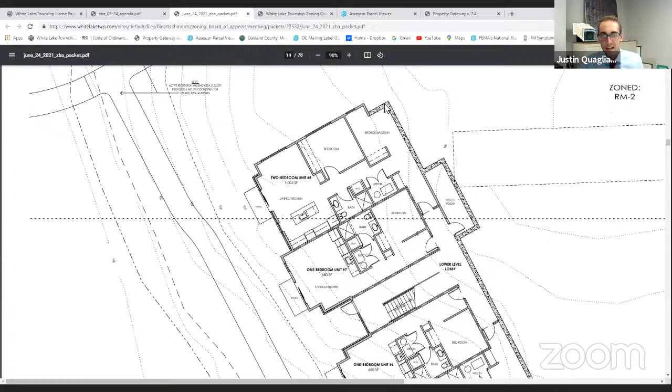So back to the site plan. I know it's hard to see on the screen, but I'll try to zoom in where I can. The minimum side yard setback in the multiple family zoning district is 70 feet on one side, 100 feet total of 2 sides. So the proposed side yard on the west is 40 feet, so they're requiring a 30-foot variance.

The east side yard setback is 30 feet. And then just for informational purposes, the property to the right, to the east - you could consider that to the southeast - is zoned R1C, single family residential. The property to the northwest is zoned RM2, multiple family.

So on the previous plan, which I can pull up later, but it's going to be kind of hard to switch back and forth on the screen, the east side yard was 27.7 feet and the west side yard was 30 feet. So a 42.3 foot variance was previously requested for the east side yard. So overall, the side yard variance request was reduced by 12.3 feet, from 42.3 feet to 30 feet.

They're also requesting parking setback variances. The zoning ordinance requires parking for non-single family residential and non-residential uses to meet the front yard setback requirement unless a 20-foot green belt is provided in accordance with the zoning ordinance. The front yard setback in RM2 is 40 feet. There is not a 20-foot green belt. They're proposing a 10-foot setback from the south Pontiac Lake Road right-of-way line, so they're requesting a 30-foot variance for the front parking setback.

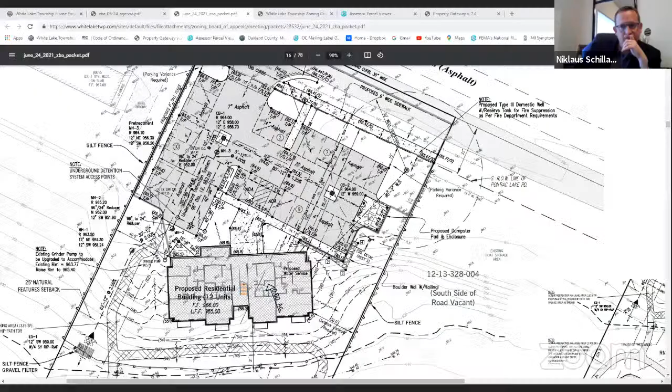This isn't to put you on the spot at all, but just a comparison—so the building has moved, the parking lot, can we really, I don't know if there's a way to see. I'll try to show it on my screen. The difference, it's going to be hard, so hold on a second and let me try to work on that. Appreciate it, thank you.

I have it here, I just gotta figure out how to show it best. Never done split screen before on Zoom, so we'll see how that goes. Hopefully we're closing in on the end of our need for Zoom skills anyways, but appreciate it very much. I hope so. I have faith in you, Justin. All right, I think I got it, and I might have to play around with the zooming a little bit.

All right, so let me share this.

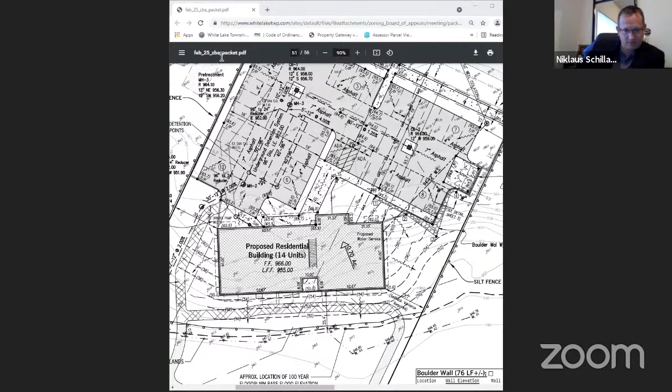Do you see two different buildings or one building? One building. Oh, now maybe you went between two. I don't know, because we see the 14 unit right now. Do you see the 12 unit one or no? No. If you go to the bottom, it looks like if you were to pan over we would see it, so I'm wondering if you almost just need to zoom out.

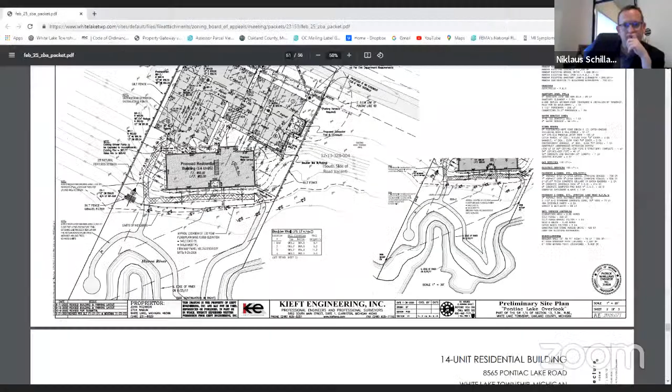I don't think it's gonna let me do it, but right now on the screen, this was the previous building that was proposed, so it was farther back, into the wetland buffer. So the building was shifted this way a bit to the north. And I can go back, here's the other one if you can see that, the 12 unit.

I don't know if it's hard to show them both on the screen.

Could I make a comment? This is Brian Howard, I'm the architect for the project. It's okay Justin, I'm trying to, sorry Nick. No, you're fine. We saw the other one. I appreciate it, I was just trying to get an eyeball, I mean I could do it on my own as well here, I'm just trying to get a sense of.

I can tell that the building has certainly moved out of the wetlands or the natural feature setback, but I was trying to really see what else changed. That's all of my questions, Madam Chair.

Thank you, Nick. Any other questions for staff? If not, then if the proponent would like to address us, he may.

Yes, thank you, this is Brian Howard, I'm the architect for the project. And Nick, just to clarify, as I'm thinking of this, when we reduced 2 units out of the building, we also were able to reduce the size of the parking area. The parking lot has changed dramatically in the sense that the trash enclosure, as well as the parking on the west, has now moved to the east and reduced 2 parking spaces out of that parking lot, as well as the parking lot that used to be 12 spaces along the east property line has also reduced 2 spaces in. So substantially less paving is occurring now based on the fact that we don't have to provide for the parking spaces for the units as well as the guest parking, so that's reduced as well.

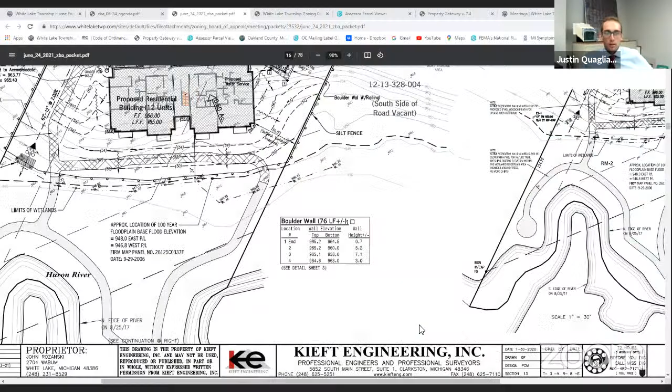Justin, I have a quick question. Do the plans show the dumpster screening material? They do. What you see here is the dumpster detail, so they're showing a poured concrete or block wall trash enclosure. Our zoning ordinance doesn't allow a poured concrete wall, so it would allow concrete masonry units, CMU, for the block. They're showing a 6-foot wall, I guess, or 8 feet, I'm sorry, an 8-foot wall with a metal gate.

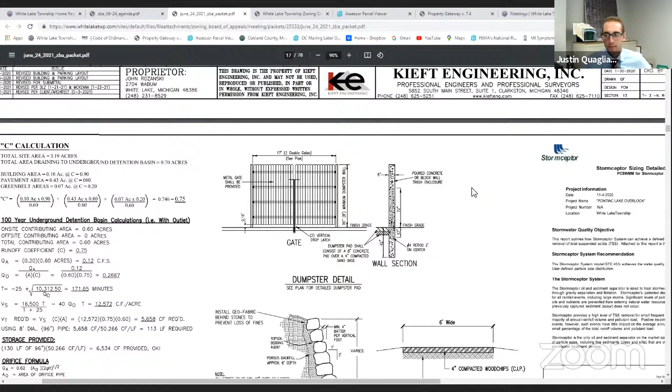Okay, I don't know if you can answer this, or maybe Debbie can. What is the building itself going to be built with? It's not going to be concrete?

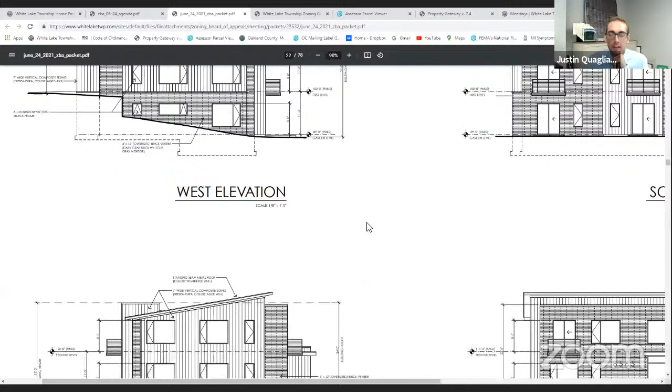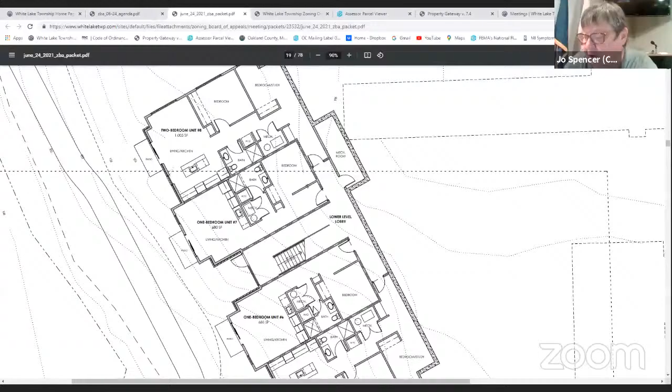No, block. They're using a combination of brick and/or brick veneer and siding, so composite siding. So I'm wondering, Mr. Howard, if it would be possible to, for lack of a better term, beautify the dumpster that's going to stick out by using the same material on the outside of the concrete block as on the building.

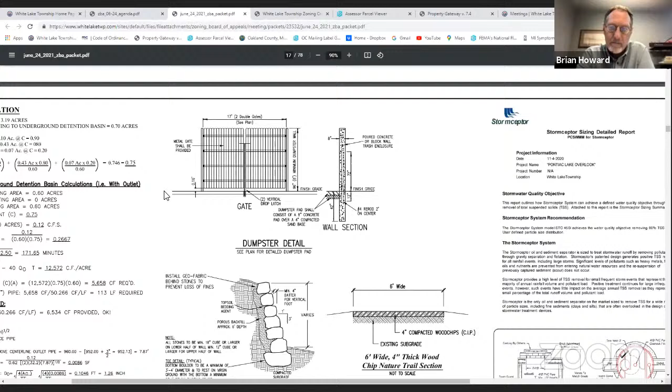Yeah, we will absolutely make that trash enclosure a brick veneer enclosure to match the building, with a limestone cap on top. Does that show on the plans already, Justin? They'll have to revise their plan. It does not currently show that. So if we make a motion, we might want to consider that as well, just to make sure everything's taken care of. Any other questions?

Go ahead, Kathleen. I'd like to comment also on the dumpster. Since it's going to be so visible, clearly we want it to look aesthetically pleasing. I would even suggest some masonry brick.

And I'm curious, are the gates metal gates in front? It was a metal gate on the detail. I'm wondering if maybe some white vinyl, something a little more attractive, would be possible.

I would propose that we make them out of wood and paint them. We've found in other cities that the durability of vinyl starts to warp over time because trash crews don't take care of gates very well. So I'd propose we build a metal frame for the gates and mount wood slats to that, then paint them. They seem to last longer and create a more visually appealing look than the metal ones, so we can change that detail without a problem.

How do you feel about maybe masonry brick as something aesthetically more pleasing than the concrete block? Oh, I believe, no, we would definitely make the exterior of the trash enclosure the same brick veneer as the building, to match. So it won't be a poured concrete wall like is currently stated on our civil drawing.

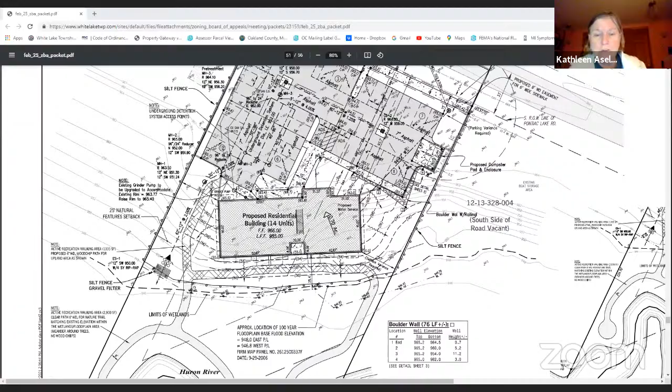Well, going back to the landscaping, since we kind of have to nail this down, I took a few notes here, and I'm thinking 3 to 4 foot shrubs, evergreen trees, some shade trees. Justin, could you maybe help out with this? You probably have more landscape architect experience than any of us. Could you make any recommendations?

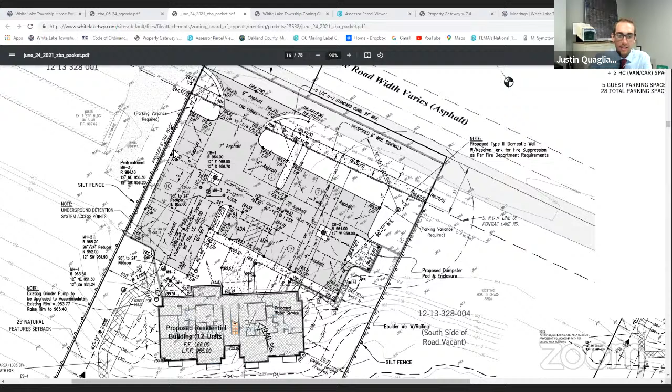So here's the plan. They have no room here to put trees on this west side or this northwest side, so you'd have to have shrubs. I'd suggest 4 feet in height at the time of planting. We put a fence there, Justin, along that property line. Okay, I see the fence, but I don't think plantings are needed against that side. What I would propose is screening the greenbelt area between the parking and running parallel to Pontiac Lake Road, certainly.

And then we have quite a bit of landscaped area. If you move your cursor towards the trash enclosure, in that area we could put shade trees, bushes, things like that. As we move down the hill, that's going to get more difficult for stuff to really last. I think they're focusing around the parking. Yeah, no, I agree 100%.

I think John's comment was spot on, which is we really do want to provide something secluded, or I don't know if we want to call it that, but something we all feel is needed. What we have to do in Royal Oak and Ferndale is provide a 3 foot high wall so the headlights of the cars don't go out onto Pontiac Lake Road. I'm not proposing that, but I think an arborvitae or a boxwood hedge or something to that effect running along in front of those car lights would be a huge benefit to screen the parking lot, but also to screen the headlights of those cars.

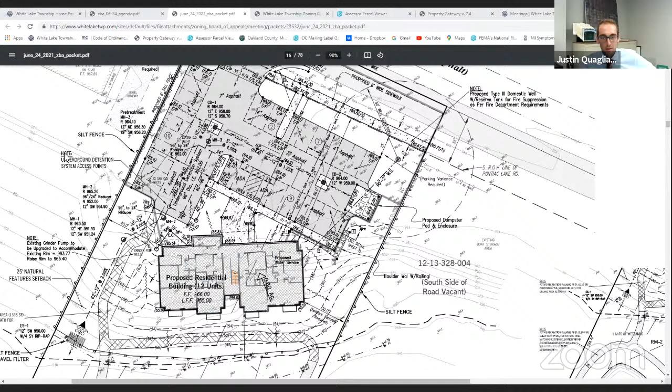When a motion is made, I'd like that reiterated and put into the motion. Could we indicate that in our motion, Justin? No, I think you need to be specific. So be specific, okay, that's what I was looking for. Thank you, I can help you be specific if needed.

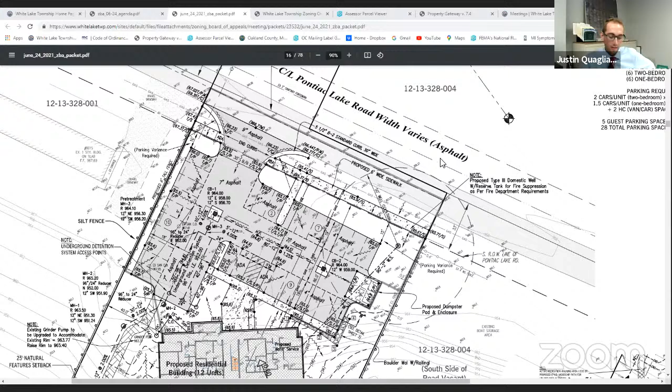Madam Chair, I have a question, for Justin or for the applicant. What type of 6-foot fence along the northwest wall is that? Is that wood or vinyl? It was going to be vinyl. Would it be white? It was going to be white, correct.

And with the landscape plan, do we need any sort of irrigation to make sure those bushes and trees don't die? Yeah, they're going to have to irrigate it. When this comes to the planning commission, the landscape plan will have to have an irrigation plan. That's a requirement.

And there's no wall or fence shown on the east side? They're showing a 6-foot tall fence going to this right of way line, if I'm not mistaken. Is that where the fence is extending? Yep. So fencing has to meet the front yard setback, you can't run a 6-foot fence all the way up to the right of way line.

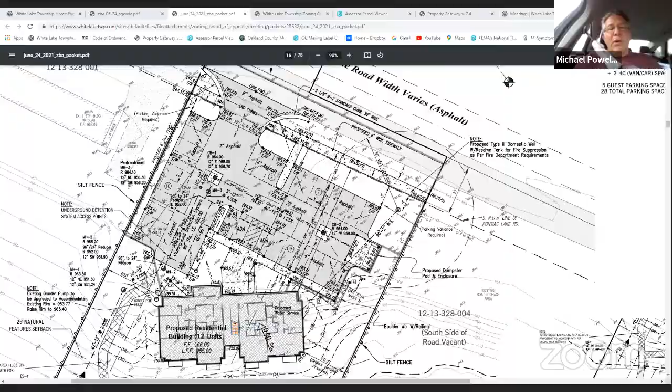Madam Chair, Mike, is Justin, are we able to allow the fence to just be lower, certainly not the 6 feet? My concern is the car lights in that area shining on the adjacent neighbor, and vegetation tends to be sparse sometimes. Are we allowed to drop it down in height to cover the headlights, or no fence at all?

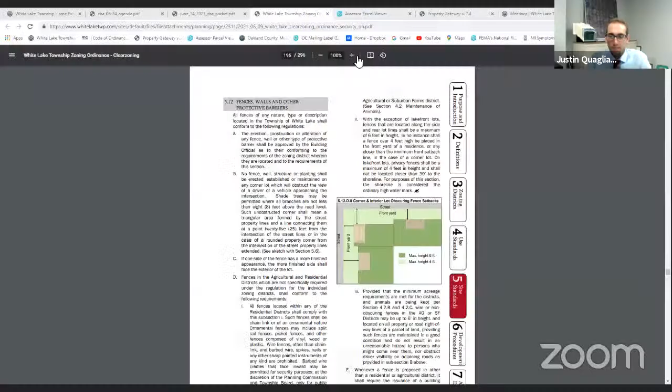The zoning ordinance does not allow a fence in the front yard. Here's a nice graphic. If there is a fence in the front yard, it has to be 4 feet. So they can't even have a 6-foot fence, it could only be a 4-foot one.

If you recall, about 2 or 3 years ago we had a case with a corner lot that had 2 front yards, on Round Lake Road maybe, or Carroll Lake, one of the two. Sorry, I got the road mixed up in my head.

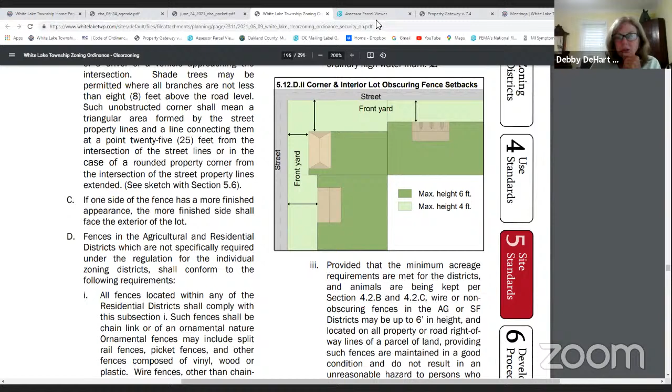So we could drop the fence once it hit the front yard to a 4-foot fence, making it a staggered fence. Really, in the front yard setback, they can't have a fence at all, and in this case the whole fence is in the front yard, so it would have to be 4 feet.

So this fence would have to be a 4-foot tall fence up until 40 feet from the right of way line, then the fence would have to stop. Everything in front of this line of the building is the front yard — imagine the line going back and forth like this, that's the front yard. And that pertains to multifamily also versus a single residential property.

Even though the parking lot's in the front yard, they could have a screen wall. The ordinance allows a screen wall, not a fence, but an actual screen wall. Screen walls would have to be 6 feet in height, so it couldn't be a fence. It'd have to be 8 inches of brick or decorative stone. So it would allow a screen wall, but not a fence.

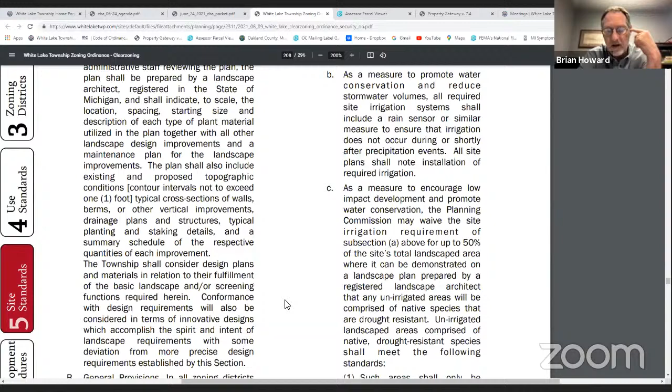So are we talking that that particular screen wall would be built similar to our trash enclosure, a brick veneer? And as Mike's comment was, then providing landscaping in front of it. I don't think, Mike, we can provide landscaping on both sides of it because we're talking about putting our wall kind of right on the property line.

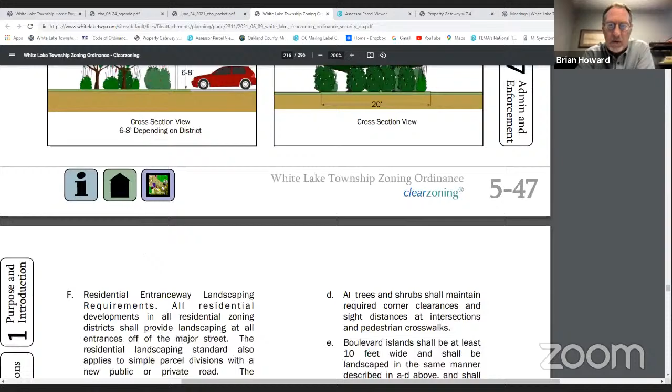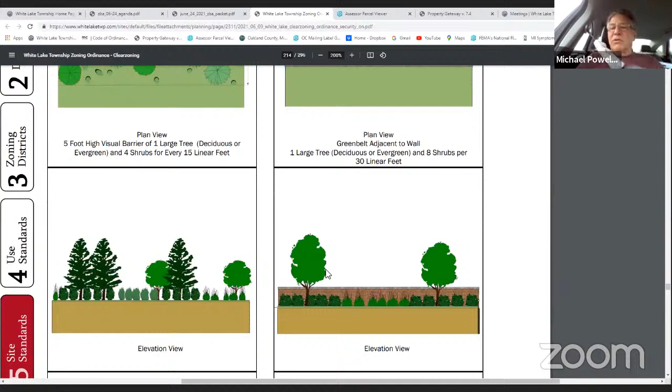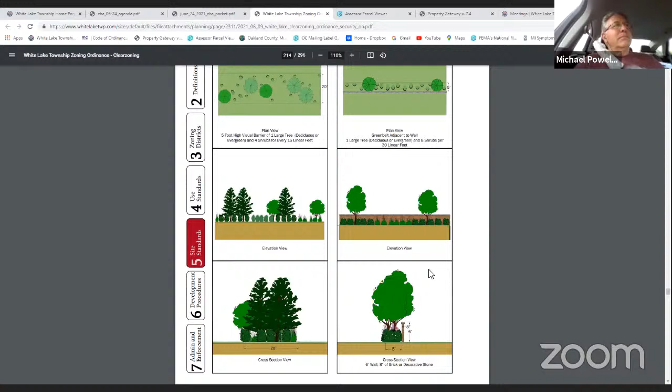I've always had a little trepidation with that because the applicant gets the beautiful landscaping and the adjacent property owner gets the view of the backside of a wall. So I typically like it more centered, but I don't think we have the room to center it, because it's only 5 feet. So it would be put in sections and maybe you jog it back and forth with landscaping. I'm just talking out loud here as an option. We're not opposed to providing a different type of screening against that property line.

We showed the fence only because that got brought up at our last meeting, which said basically try and figure out something to do with the headlights of the cars. I don't think for us it matters. I don't really want to see a 6-foot high fence there anyway, to be honest. I agree. I would prefer to see a 3-foot tall wall.

I don't know what our options are from the zoning ordinance, but could we do a metal aluminum fence that's narrower than a brick wall, that would allow potentially fountain grasses or arborvitaes on both sides, because now we're talking about more of a minimal thickness of wall. Yeah, and we have to be careful, it's not a fence, it's a landscape buffer enhancement.

And if we did that along the east side, quite frankly, we ought to talk about it along Pontiac Lake Road as well, to provide for an architectural feature that kind of blocks the front end of cars parked in through there, because landscaping is sparse, and it might be nice to have a landscape buffer enhancement there to pull your eyes away from the cars.

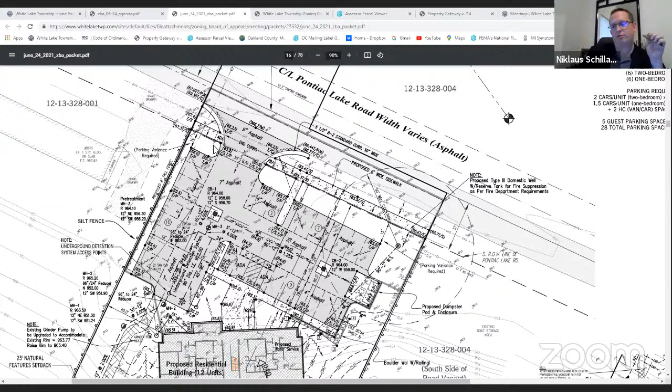I thought that was discussed at some point. I don't have a note on that, but I don't disagree. I thought it was 4 street trees that came up. We would provide 4 to 5 shade trees along Pontiac Lake Road, between the sidewalk and the new wall.

Anything else, fellow members, that we missed? You took all of my notes.

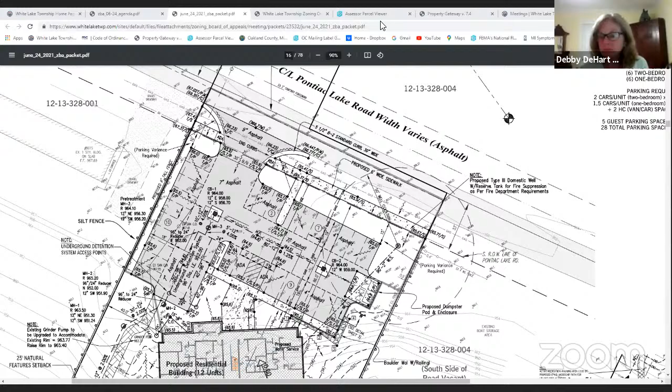Ms. DeHart, for reference, the planning commission has the final say on approving the landscape screening. Should I specify that as well? I guess we have to say that these conditions would have to be satisfied in order for the planning commission to approve the landscape plan. So if the ZBA is requiring conditions, when the planning commission reviews the final landscape plan, they'll make sure that these conditions were satisfied, if it doesn't meet it, they'll be back here. Is that what you were getting at, Debby? When this comes back to the planning commission for final site plan, they'll have to show that all of these requirements were met.

No, because that's implied - the ordinance requires that the planning commission review it. Did we address the perimeter curbing and guttering in this yet? Yeah, they're not getting a variance for that, so we don't need to include that.

Do we have a support on Nick's motion? I don't think he's gonna want to go through it again. Nick, please repeat that motion again for us. Well, I'm gonna make sure Hannah got it all first. Do we have a support first? I'll support. Debby can support. Kathy, go ahead. Kathy supported, Debby supported.

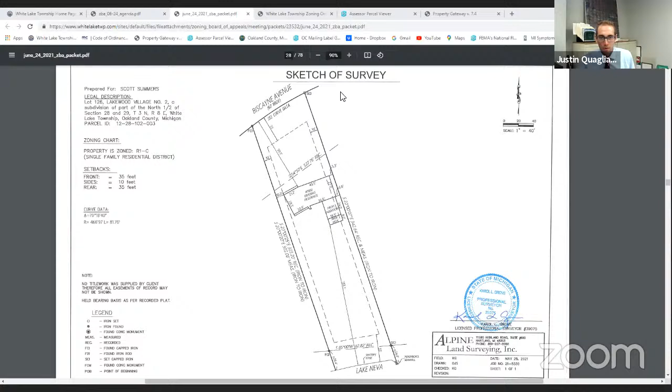The proposed addition is 444 square feet in size and located 6.6 feet from the east side lot line. The proposed deck is 148 square feet in size. The architectural plans note the added area would be 535 square feet. The addition and deck total 592 square feet in size.

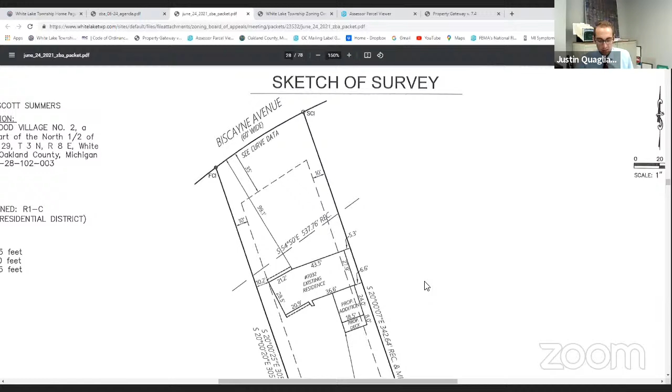Additionally, the architectural plans—where are we here? Sorry if you get seasick while the plans are being scrolled through.

The architectural plans show the roof overhang located 5.25 feet from the east side property line. The proposed side setback—they're requesting a variance for a side yard setback to be 3.4 feet, or a 3.4 foot variance for a 6.6 foot side yard setback. With a 1.5 foot overhang and that setback, the roof would actually be 5.1 feet from the east side property line.

If the board approves the request, The plans will just need to be revised for consistency.

Article 7, Section 28 of the zoning ordinance states repairs and maintenance to non-conforming structures cannot exceed 50% of the SEV, state equalized value, in any 12 consecutive months. Based on the SEV of the structure, which is $99,600, the maximum extent of improvements cannot exceed $49,800. Value of the proposed work is $96,000.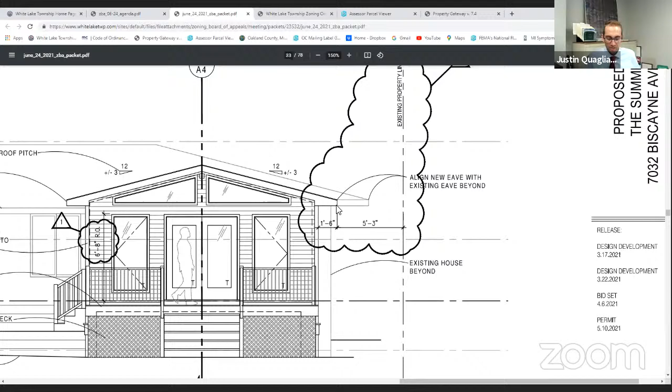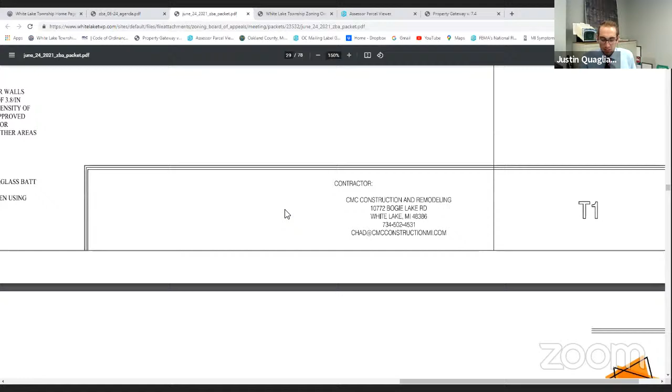So a variance to exceed the allowed value of improvements by 193% is being requested. In summary: the side yard setback variance request is 3.4 feet to allow a 6.6 foot side yard setback, an 18.3 foot variance for the lot width, and a 193% variance for the value of improvement.

If you have any questions, I'd be glad to answer them. Thank you. Any questions of staff?

I'll have one, and I'll ask it now so it gives Mr. Summers a chance to think about it too. It's appearing to me that maybe the side yard setback—the house couldn't move any further over because there's a window there. That might be the issue.

Yeah, this is Scott Summers. Oh, sorry, we'll get to you in a second. Okay, I didn't know if you wanted me to reply. No problem, I'm just giving you a chance to think about what I'm going to be asking here.

I'm just trying to think, Justin, is there any other reason you'd see why that wouldn't move over, other than a window? I believe that's the case the applicant is going to make, that there is a window there, and that was their case they were going to make.

Okay, that's helpful. Any other questions of staff? Justin, do you know the year this house was built? Yes, I do, and I had that.

And for some reason I didn't put it in the report. Hold on, I have it in my notes here. I don't know why I didn't write it down. This house was built in 1960. So in 1960, those setbacks would have been approved when they constructed the house. They received a building permit to construct the house in that location.

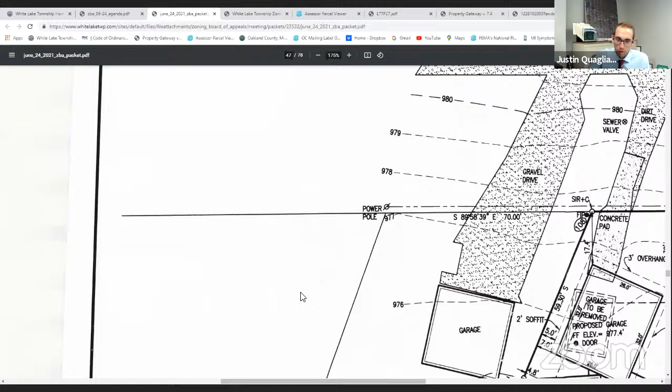So currently, the existing structures are non-conforming, and the detached garage, which you can kind of see cross-hatched here—I know it's hard to see with all the lines, but that's the existing 1-car garage—is considered part of the principal building because it's located within 10 feet of the house. So the 2 structures comprising the principal building are 4.7 feet from the side lot line, which is here at this corner of the house. And then the current garage is 26 feet from the front property line.

A minimum of a 10-foot side yard setback and 30-foot front yard setback are required in R1D zoning. The parcel is also 70 feet wide at the right-of-way line, and in R1D zoning, the minimum lot width is 80 feet. So the proposed addition is...

1,708 square feet in size. The first floor would consist of a 676 square foot 2-car garage and 200 square feet of living space, including a new laundry and utility room. The second floor would contain 832 square feet of living space, including 2 bedrooms and 1.5 or 2 bathrooms.

The plans show a 5-foot by 5-foot porch here, which would provide access to the addition. It's my understanding that the current front door would be closed off if this addition were to be constructed. And then the plans provided by the applicant show that this area here is where the tie-in will take place. They'll have to construct appropriate footings or a foundation. Right now, there is nothing there to support it, so that would have to be somehow constructed to meet building code.

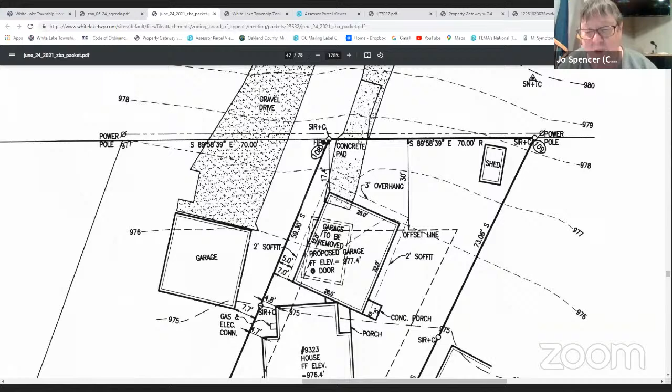I can calculate a different value if that's the direction you go. If you have any questions, I'd be glad to answer them. Thank you, Justin. I was going to ask that you calculate the percentage just in case we do want to go that route.

Any questions of staff? Mike, go ahead. Yes, thank you. Am I able to be heard? Yes. Okay, thanks. It's interesting that modern cars turn off automatically after a period of time, and that disconnects me from everything, and I have to get back in when the car turns off and turn it back on again.

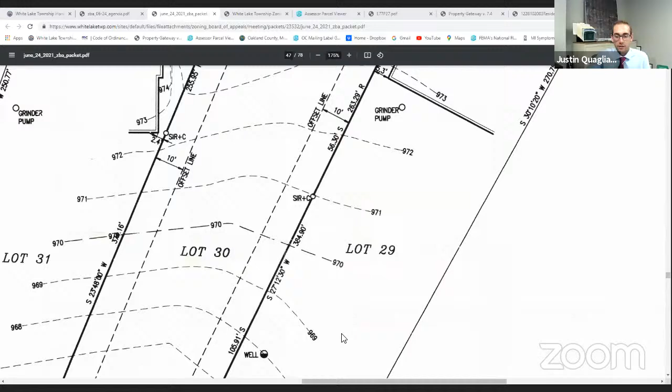So I'm just wondering, Justin, whether or not the floor plan for the existing structure was submitted as well. It's very vague how this new addition is going to relate back to the existing house. So we have renderings, we don't have a real floor plan. I can show you what was submitted.

So on the right side here, I'll go through several photos or renderings the applicant provided. This is the current house. This is the proposed addition. So you can see there'd be a connection here.

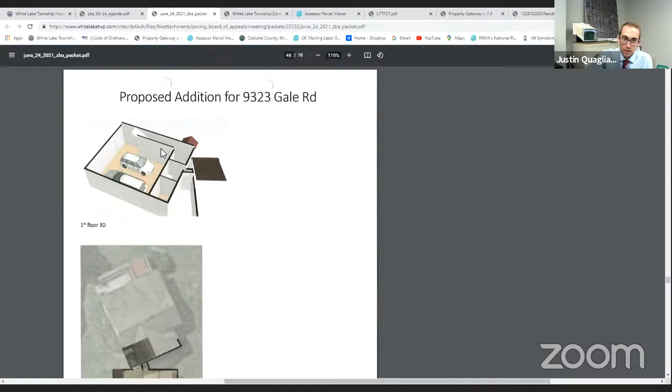You walk into the laundry room, which is separated from the utility room and the foyer by a door. So there's a door here, and there would be a door here. And there's the covered front porch. So you can either go up this way into the addition, or through the laundry room into the other house.

So you can kind of see, from an aerial view, the current house connecting to the proposed addition, walking into this vestibule area here, so you can either go up this way into the addition, or this way to the west into the main house.

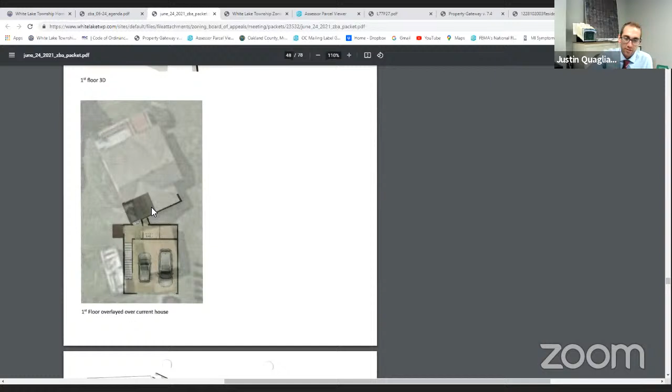This is another view. This is their current front door, which the applicant said they would close off, and this is where that connection would be to the addition.

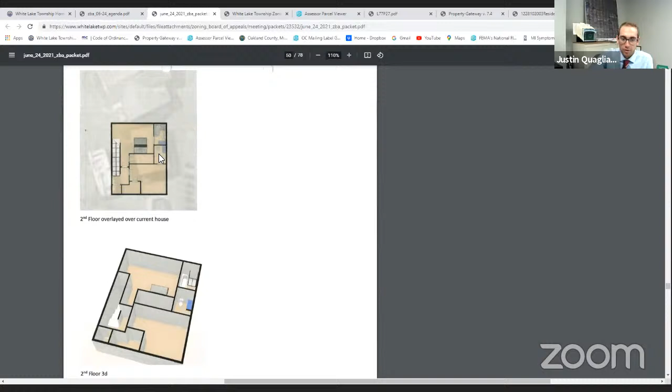This is the second floor layout of the addition. So there's a bedroom, a closet, a full bathroom, another bedroom, another closet, and what looks like a half bathroom on the second floor.

That's a rendering of the addition, and then that's another rendering showing how the existing house would connect to the addition.

So, my overall question was, I don't know how many bedrooms the existing house has. It has 2 bedrooms. Okay, thank you.

So there's 2 bedrooms proposed in the addition, and the current house has 2 bedrooms. I don't know if that answers the question.

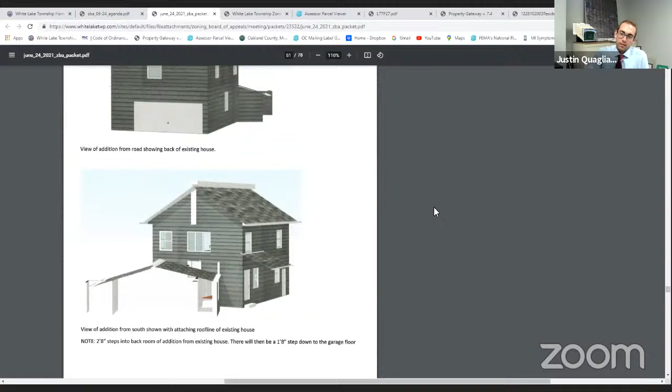I'll ask the applicant how the two parts, the new addition and the existing home, are going to relate to each other. They almost seem very distinct, and as you pointed out, it almost looks as though you could have two separate families living in this structure.

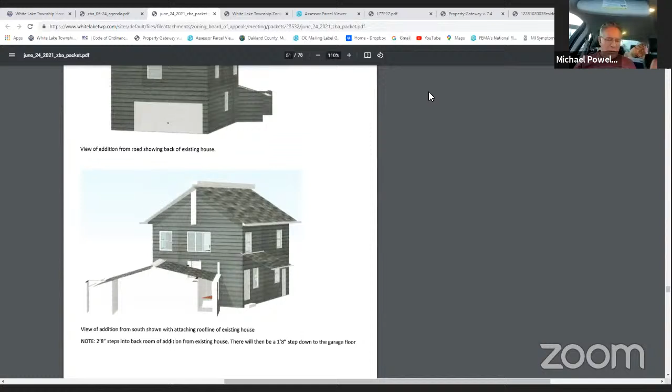Sure, I'm happy to answer that question, and I totally agree it can look like that. Yeah, why don't you wait? We have to finish our discussion first. Okay, sorry. That's okay, that's very common, don't worry about it.

Any other questions of staff? Yeah, Justin, so SEV, it's just coming to my mind, even if we throw a big number on, what happens? I mean, the SEV

is determined after the construction is complete, correct? So you're talking about what the value of the property, or the structure, that's the increase, yeah. So, isn't that determined after everything is done? So they have to give us a valuation of the improvement, and that's what we base our building permit fees on.

And then, when you have a non-conforming structure, the purpose of that section of the ordinance is to limit repairs and maintenance to a non-conforming structure within 12 months. So I don't know, right now the SEV of the house is $39,400. I can't tell you what the SEV will be after the addition, but based on the International Code Council, the value of that addition is $169,400.

That's what the International Code Council says the value of that addition is based on the current construction costs.

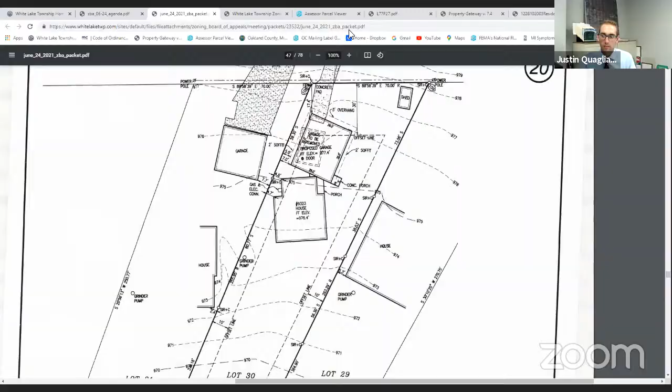Because Mike, I don't have my computer screen in front of me, and the width of the lot is 70 feet, and that is the east to west request, and he's providing a 7-foot setback on the west side. So I guess my question is, are some of you saying that on a 70-foot wide lot with a 10-foot setback requirement on each side, that a 50-foot wide house is a hardship?

I don't think I understood the discussion that the width of the lot is a hardship, and I didn't follow that thinking. I think the width of the lot hardship is because he was asking — I have to go look back for the variance. A variance, isn't it 80 feet?

So that's the zoning standard. I guess what I think, Mike, what you're trying to get at is that there's a lot of lake lots that are less than 40 feet in width in R1D zoning, and this is 70 feet in width. So someone could build a 50-foot wide house on this parcel regardless of the width. So if they met all their setbacks, they wouldn't be before you because the lot was not — it was 70 feet wide and not 80.

So if they met all their setbacks and lot coverage and building height and all the other zoning requirements, then they wouldn't be before you because the lot's 10 feet too narrow. I thought that was minimum lot, but that's variance number 3.

So even if they did construct a house that fit in there, they would still have that. And that was what I was getting at, was that is the hardship for variance number 3.

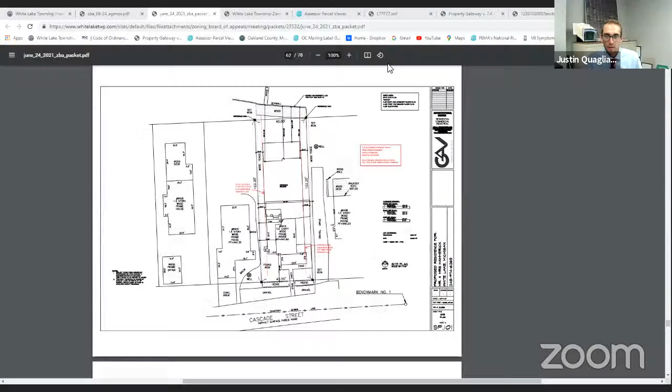Thank you, Madam Chair. On the screen before you, this is a site plan provided by the applicant. This property is 4,880 square feet in size. It's located on Cooley Lake. It's zoned R1D. The property is currently undeveloped. The previous home was demolished within the past month or so. The property does have access to the public sanitary sewer system.

The applicant is proposing to construct a new house. Back in October of 2020, the Zoning Board of Appeals approved variance requests from the prior owner to construct the house. Variances are valid for a period of 6 months unless a building permit is obtained during that time and the project is commenced in accordance with the terms of the building permit. The prior owner did not obtain a building permit within 6 months of approval, so the variances are expired and void. The following variances were approved at the last meeting: a 5-foot variance from the east and west side yard setbacks, a 10-foot variance from the front yard setback, a 26.86% variance to exceed the maximum lot coverage, a 40-foot variance from the required lot width, and a 7,120 square foot variance from the required lot size.

So in May of this year, a permit was issued to demolish the former 1,100 square foot house, and that house was non-conforming. Here's a survey that was submitted by the applicant showing the prior house. That house was non-conforming; it didn't meet the front and side yard setbacks.

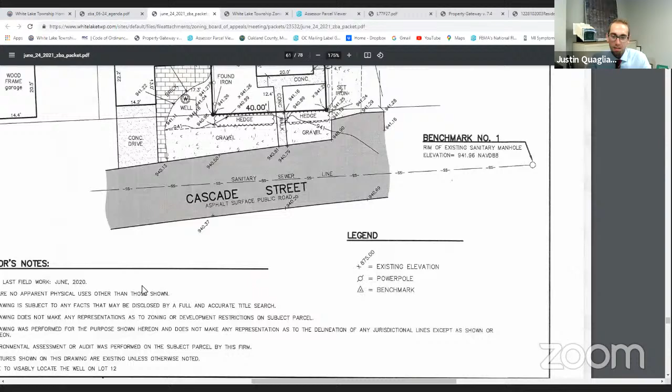So a 5.9 foot variance from the west side lot line, 12.4 feet from the front or south lot line. So a minimum 10-foot setback is required on the sides in R1D zoning, and a 30-foot front yard setback is required in that district as well. And again, the parcel is non-conforming to area and width, but those variances run with the land and don't expire. They were already granted for lot area and lot width.

So there were some slight changes to the floor plan, but the overall footprint of the building has remained the same. The previous plan had a 578 square foot 2-car garage, and now it's a 731 square foot 3-car garage. On the second story, a dormer was added on the west side of the bonus room, which added some square footage, and a balcony on the second story was removed. Overall, the plans show the second story increased 72 square feet in size, but the footprint remained the same. So the house is 3,310 square feet in size, including the 3-car attached garage.

Again, the same variances are being requested as before: a 5-foot setback variance on both the east and west property lines. The new house is also requesting a 10-foot variance for the front setback. Lot coverage would be 46.86%, that's 2,287 square feet of coverage on the 4,880 square foot lot. So again, it's a 26.86% variance, which is 1,311 square feet of coverage.

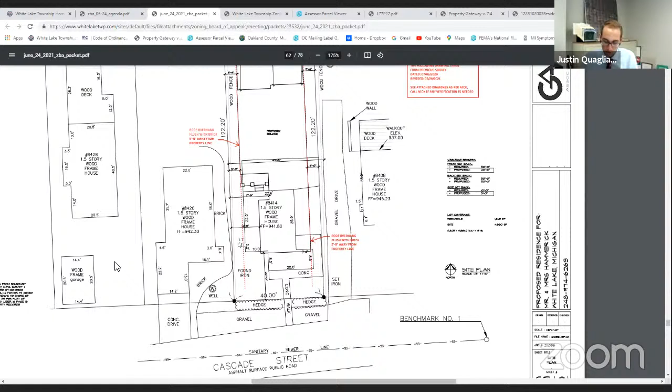Looking at the proposed house and the one on the west, I'm trying to get a sense of this 10-foot factor. How close is that house? I saw that there's a brick walkway, they have their grill out there. Can we see how close that house is to that lot line? Yeah, let me show my screen again.

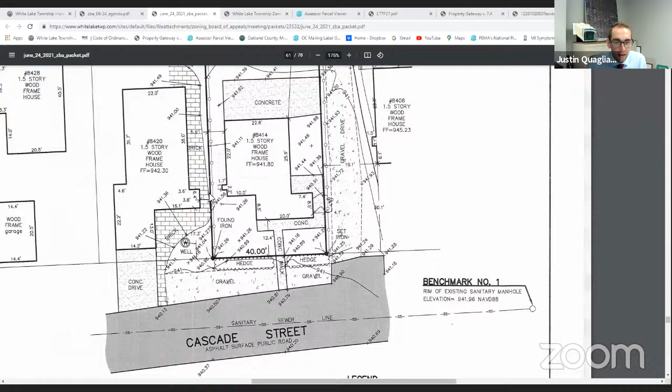So here's the dimension to the west. I don't know if they labeled it. It might be, and I think Joe has the plan, or else I could scale it. It appears, I don't know if that's 6 point, or is that 3.8? I don't know if it's at 3.8 or if it's at 6.4. I can't tell the dimension, so I can scale it.

And along with this, something I didn't see back in October - the house is demolished, so it's easier to see things now - not on this property, but on the property to the west, there is a tree right at the line. So I'm just wondering, obviously we can't tell the neighbor to take down a tree in a ZBA meeting like this, but I'm just wondering about the ability for rescue crews to get through that area.

So this dimension when I'm scaling it appears to be referring to that 3.8 foot dimension. I think that 6'4" dimension is referring to that other piece. So this piece looked like it was referring to that label. And then the 3.8, and then it's a 5 foot. Is that correct, or did I recall that incorrectly?

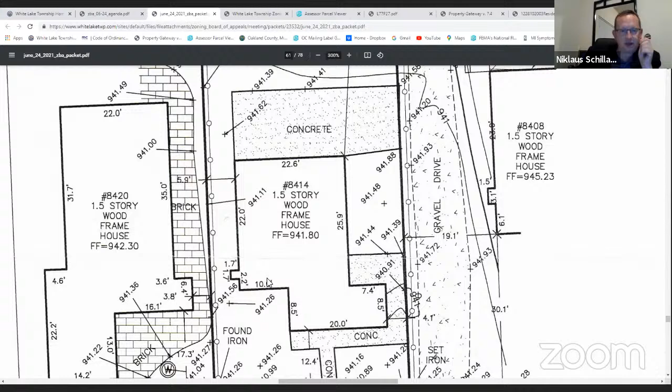Sorry, you broke up a little bit. What was that? The variance being requested is how far? Again, the variance being requested is 5 feet. So that would make the gutters and everything aside, overhangs, that would make that 8.8 feet, not 10 feet, correct?

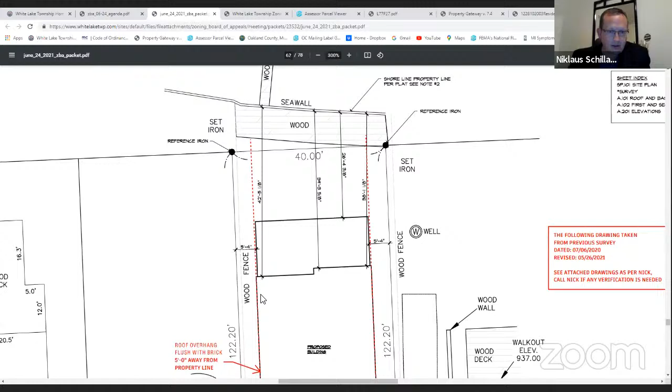I'm sorry, I'm losing my concentration. Say that again. No, you're fine. So that would make this 8.8 feet wide, not a 10-foot wide scenario? Well, I think it's... or is that just a different spot where it's 5 feet? It's a different spot. So here, up here where it's 5 feet, it's certainly wider back there.

This site plan is drawn really poorly because the old house is underlaid and it's really confusing. Oh my gosh, I see, I got it. Okay, I see the thing that's sticking out is the old part. That shouldn't even be there. It's confusing. But the tree that I'm seeing, I saw in person, is somewhere right near the back there, just behind where the grill is sitting on the neighbor's property, right in the middle.

I can pull up an aerial photo if that might help. I took a photo, I can put it on my screen if you want. I don't know, actually, let me - is Jacob able to hear me? I could throw the photo up.

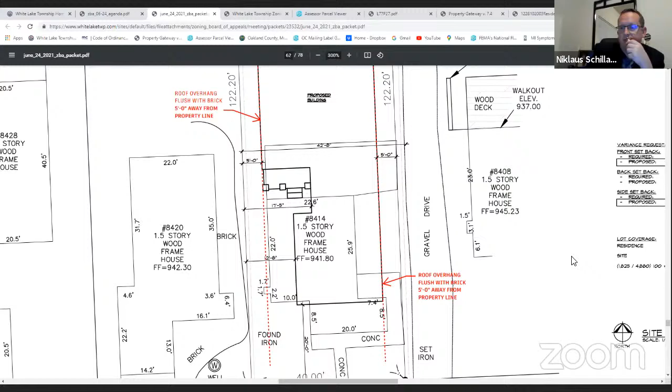Yeah, he can, I think you have that ability. Hey, Jacob, you should have the ability to screen share. Okay, it'll let me give it - the bottom of the screen, green button. Got it. Okay, let's see. I'm almost there. Okay, so this is - here it is right here, and it's coming up.

So I see the property on the right is the one we're considering. The one on the left is where the trees are, or tree. I don't know if that's a birch, I can't really tell, but it looks like a birch tree. Yeah, it does.

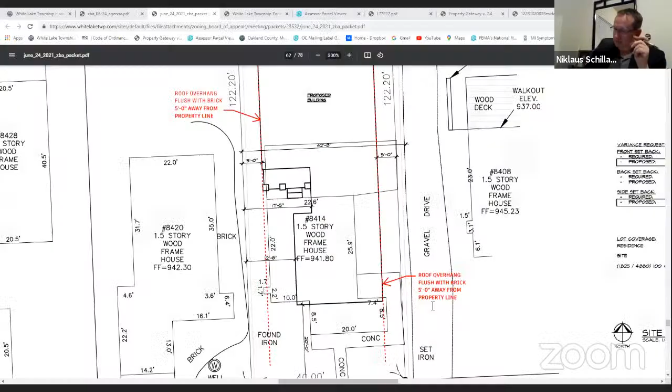So again, I'm just considering the emergency access piece of this. I might have a better angle to see how far back that is on the property. Let me stop sharing that one and share another. It's kind of hard to tell because that other house wraps around. Thank you, Jacob. I think the tree is probably back in this vicinity somewhere. You do? Okay, that's good.

Any other questions of staff? Go ahead, Kathleen. Okay, I'm getting a little tired here myself, and I hope this isn't a dumb question, but could the setbacks be made if it was a smaller house? So it's a 40-foot wide lot. 10-foot setbacks would mean that the house would be 20 feet wide. Okay, thank you.

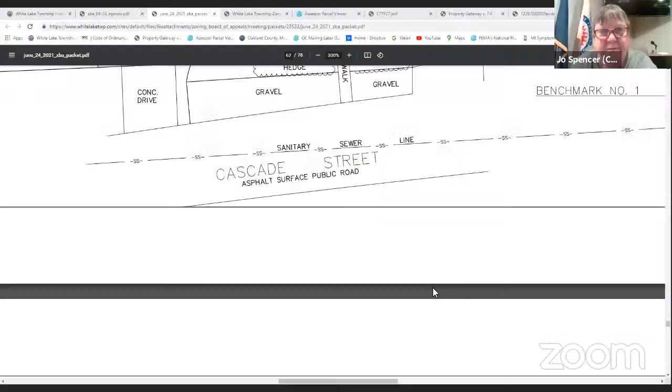Any other questions of staff? I have just one. Sure, Mike. I'm just curious, the 3-car garage - certainly no one has a right to any garage, but it was granted in the past, and now it's become a 3-car garage, which is going to look even more ominous from the street. So when the applicant gets an opportunity, I'd like him to discuss that. Sure. I don't think it'll look any more ominous because it's a tandem, so it's still going to look like a 2-car garage from the street. Ah.

I can try to throw up the floor plan.

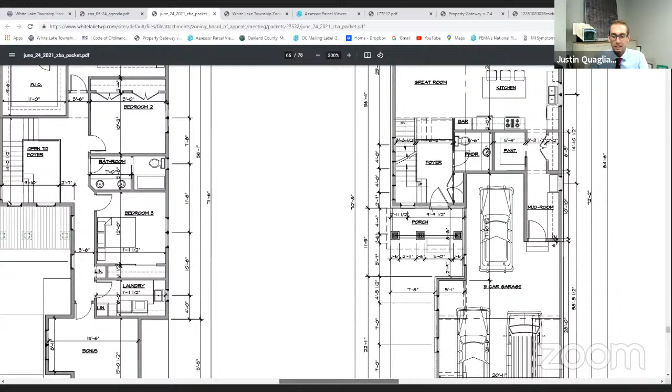See it here on the. Oh, yes. Thank you very much, Justin.

Any other questions of staff? If not, Todd, if you or anybody else that's with you want to jump in, now's the time. I can say something, do you hear me? Yes, could we have your name and address please, sir?

My name is Ghassan Abdenour. I'm the architect on this job, and I worked with Todd, and we worked with the planning and the building department. Thank you for having us here tonight. It's been a long night, I agree. So I just want to ask you, we did go in front of you. My address is 24001 Orchard Lake Road, Farmington, Michigan.

We came in front of you in October, and we went through the process, and we got approval on those variances. What we did with the plan, the footprint is exactly the same, but the only thing approved at that time was that we wanted to make sure the gutters and the overhang were part of the 5 feet. So in this house, we took the gutters and the walls in. The footprint is a little bit smaller than what was approved in October, just to make sure the gutters and overhang line up with the brick wall and it is 5 feet away from the property. Everything else we kept the same.